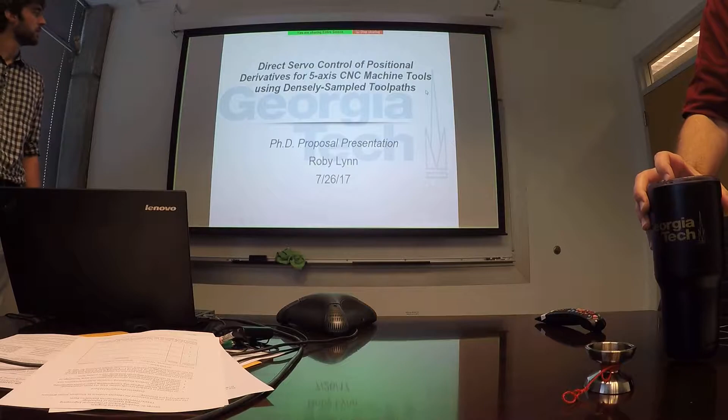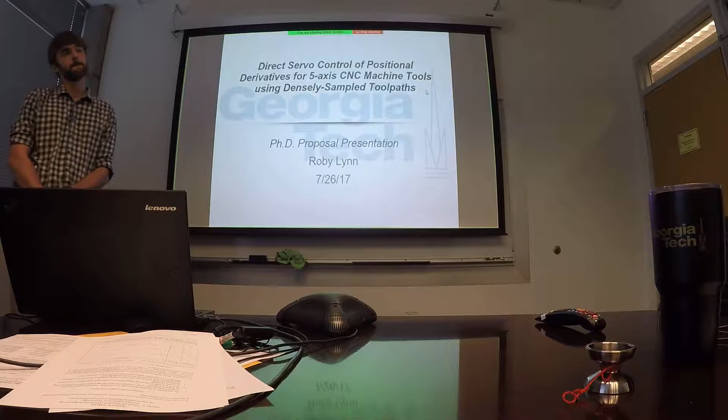I think we have some very exciting stuff. Just to preface it, because I want to make sure the bar is held very high. We did go over some of this with Mazak. You saw the smooth controller there, and Mazak's CEO made the following statement. He said, well, clearly you know more about our controller than we do. So, not to set your expectations high here, but that's exactly where we're at. Oh, and my apologies, our triangular friend here is Tommy Tucker, so Dr. Tucker, who will be also on the committee.

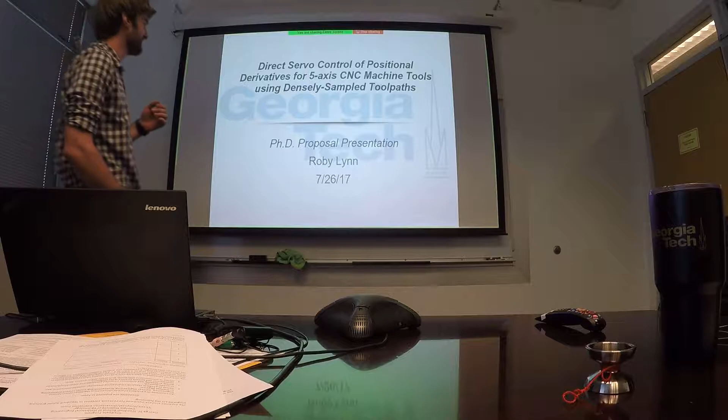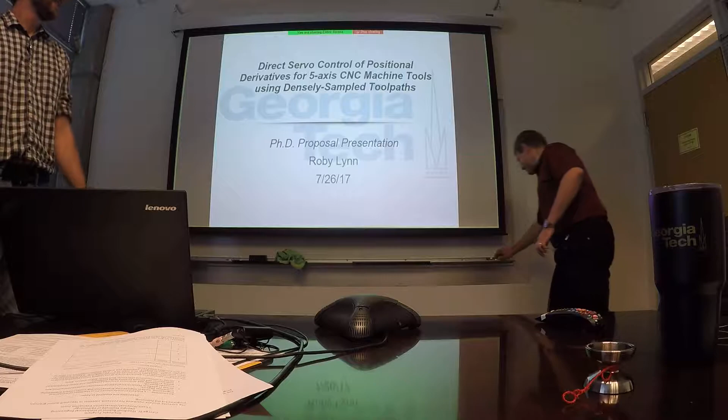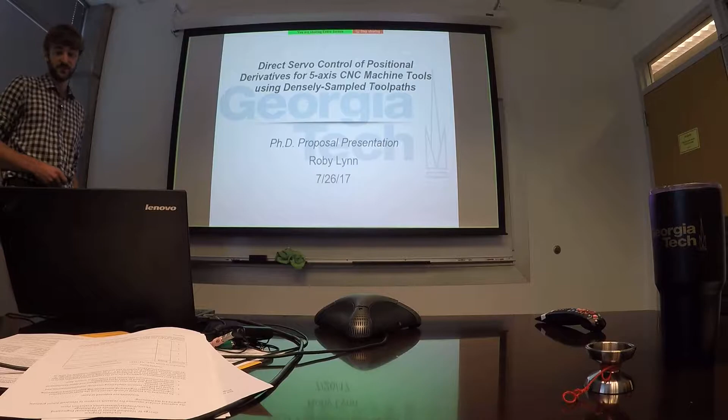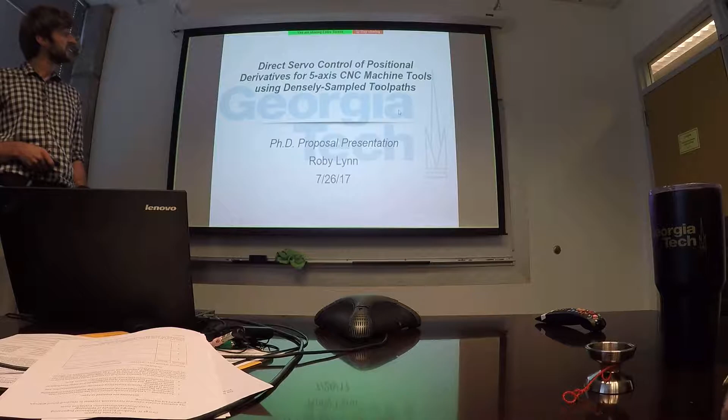Presentation entitled Direct Servo Control of Positional Derivatives for 5-Axis CNC Machine Tools Using Densely Sampled Toolpaths. As you know, my name is Roby Lynn. So first, I'm just going to go over a brief outline of the talk today.

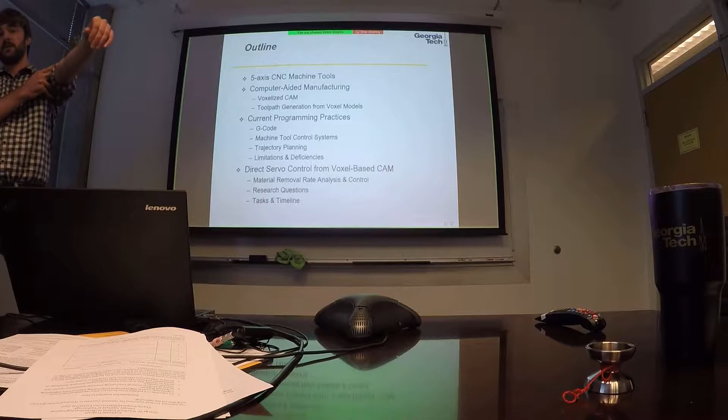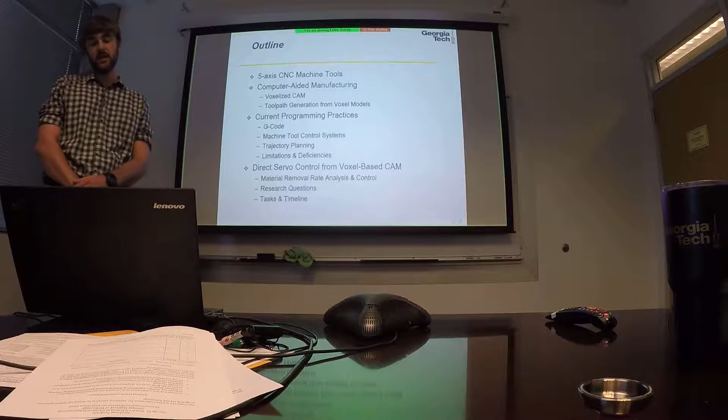So we'll talk first about CNC machine tools, specifically 5-axis CNC machine tools. Then we'll talk about computer-aided manufacturing, voxelized computer-aided manufacturing, and toolpath generation from voxel models. Then we'll talk about the current programming practices of CNC machines. The primary point here is G-code. We'll also talk about machine tool control system architectures, trajectory planning, and limitations and deficiencies of current approaches. And then we will go to the proposed solution here, which is direct servo control from voxel-based CAM.

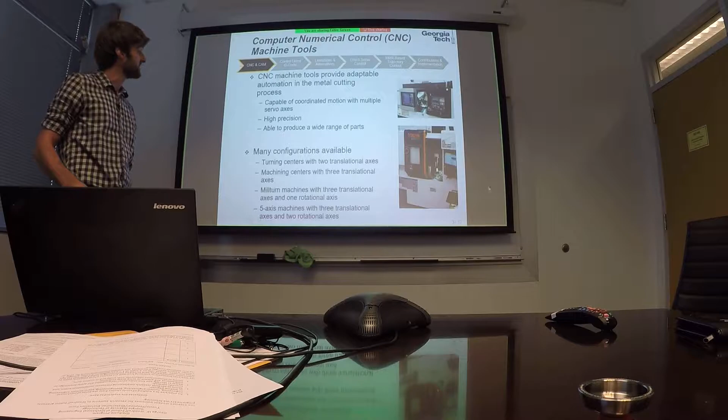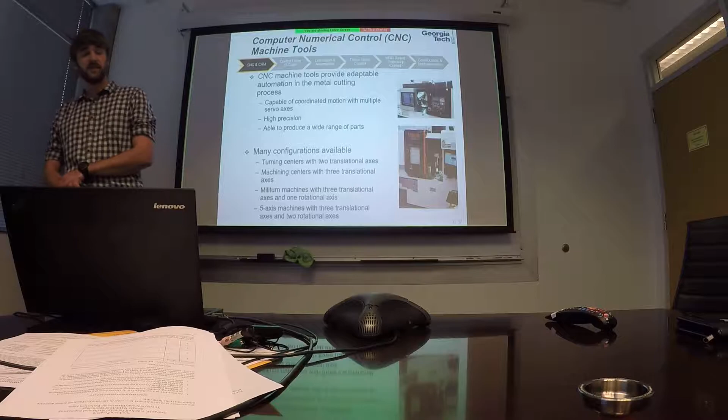There are a number of different types of machines. On the right here we have a 4+1 axis mill-turn machine. This is based on a lathe, and it has a milling head that can index. And then on the bottom we have a 5-axis milling machine. Both of these are on Georgia Tech's campus, actually at our new manufacturing facility. But these aren't the only kind of CNC machines - there are 2-axis lathes, 3-axis machining centers. But for the purposes of today, we'll be talking about 5-axis machines specifically.

So 5-axis means obviously you have 5 axes, and each of these axes can control one aspect of motion of the cutting tool.

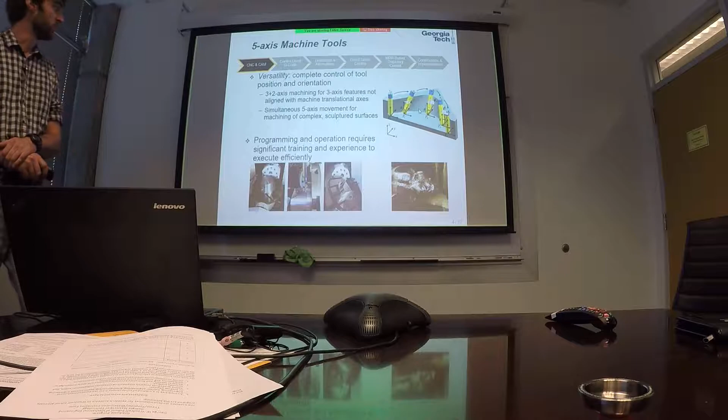5-axis machines allow us to do 2 important things. The first is called 3+2 machining. This is where we machine 3-axis features on planes that are not aligned with the translational servo axes of the machine, such as in this bottom image. You can see we've machined planes by rotating the table holding the workpiece, which in this case is the aluminum cylinder, and we've machined planes at different angles.

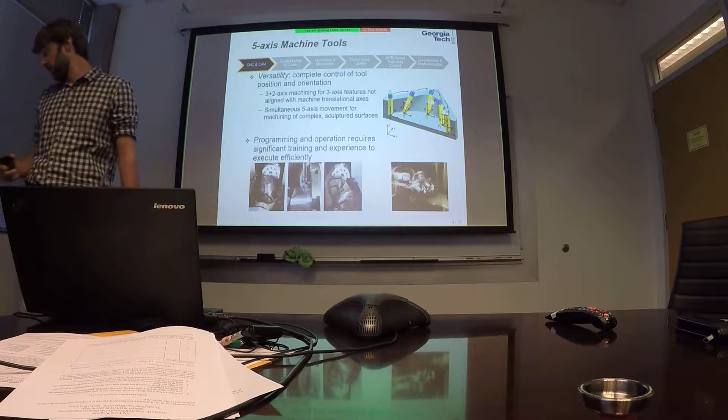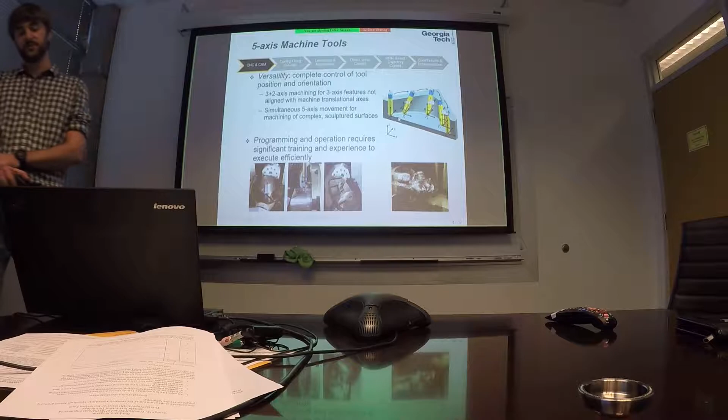The more important thing we can do with 5-axis machines is create complex sculptured surfaces like you see on this King Kong bust, which I have brought today and will pass around. We can move all 5 axes of the machine at the same time to create complex surfaces like this. While that sounds great in theory, it is exceedingly difficult to do, and requires a lot of experience and know-how to both program and operate a 5-axis machine tool to do simultaneous 5-axis machining, which is why we use computer-aided manufacturing, or CAM software.

CAM software is the software that links the design process to the manufacturing process in some way. It allows us to plan what are called tool paths for machining a part within the computer from a CAD model. For those who are unaware, CAD is computer-aided design, so we'll design a part in CAD, import that into the CAM software, and then plan the machining process there.

This provides some level of cognitive offloading from the user because the software is doing the computation to create the tool path. The user is not doing that manually. It allows for visualization and simulation as shown in the bottom here.

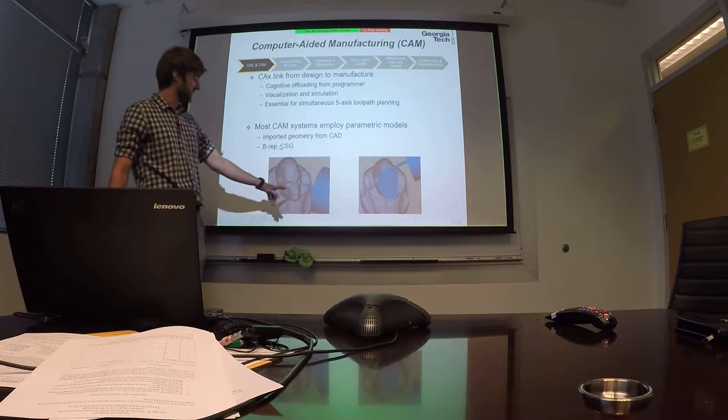So again, here's our friend King Kong. The cutting tool is shown in blue here. The model is in gray, and here is the tool path shown on the face of the model, and the cutting tool, we can animate that driving along the tool path.

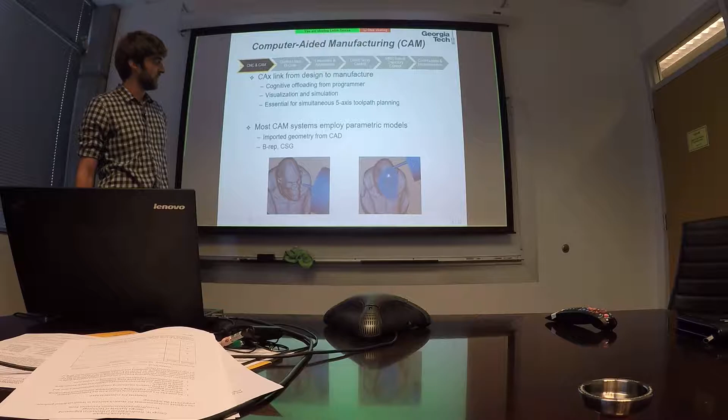This is really essential for creating 5-axis tool paths because of the number of variables involved. We have to control 5 axes in a coordinated fashion throughout the tool path. So without CAM software, this would be very, very difficult to do.

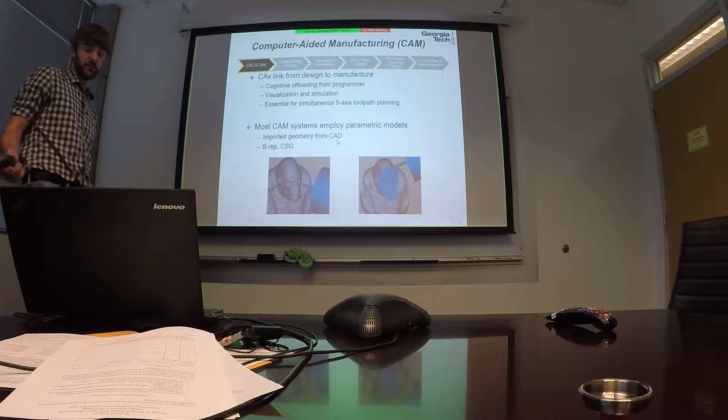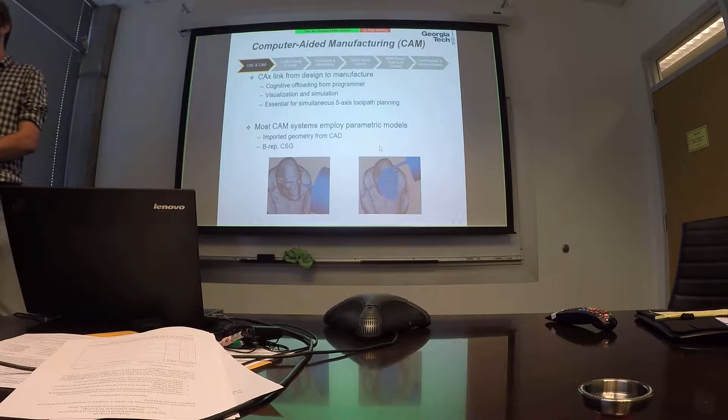CAM software has been around for a long time. It is primarily based on parametric geometry that's imported from CAD. This would be boundary representation or constructive solid geometry, or some combination, to define the part model. That means the surfaces and features that define the part are described in an analytical way, similar to vector graphics.

However, for the purposes of this work, we are relying on what we call Voxel Based CAM. So instead of using surfaces described by equations, we are describing surfaces by these small blue squares shown in this image, and this is good for a number of reasons.

So this allows for simplified collision checking. When we're doing machining simulation, we can have high complexity surfaces made up of these little voxels. We can simulate material removal and also deposition if we were doing additive, but in this case only subtractive. We can simulate material removal easily.

The voxel model is actually effectively a large array. The voxels are three-dimensional pixels. They are cubes, not squares. So if we extend the idea of pixels in an image, we come up with voxels, these little cubes here, and the voxel model is effectively a large three-dimensional array.

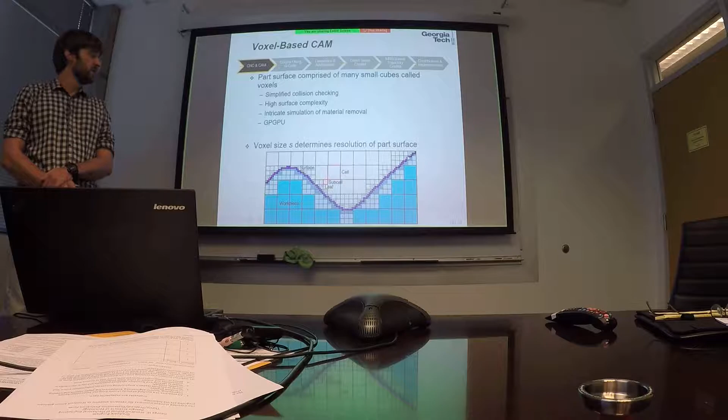In order to speed up processing on the array, we can use a parallel processing platform or graphics processing unit. This bullet, GPGPU, means general purpose computation on a graphics processing unit, which is what we do to accelerate operations on the model. The side length of the voxel will be denoted for the rest of the presentation by S, and that determines the resolution of the part surface, similar to how the pixel size determines the resolution of an image.

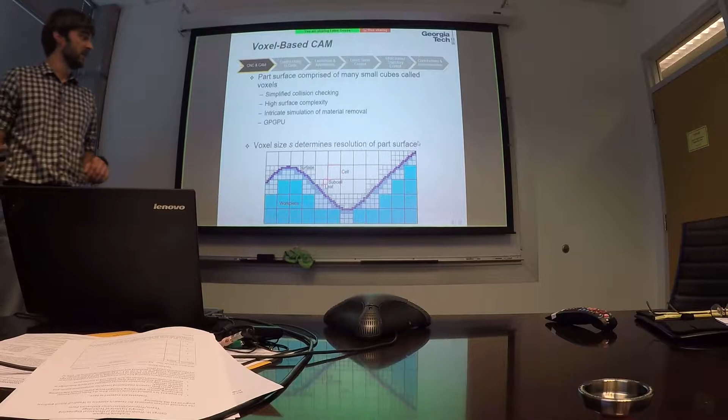In order to plan toolpaths from a voxel model, there are two important concepts we need to discuss. We have 5 axes to control: 3 translational axes and 2 rotational axes. The first thing we're going to do is determine the translational axis positions along a toolpath, and we do this by combining a series of volumetric offsets.

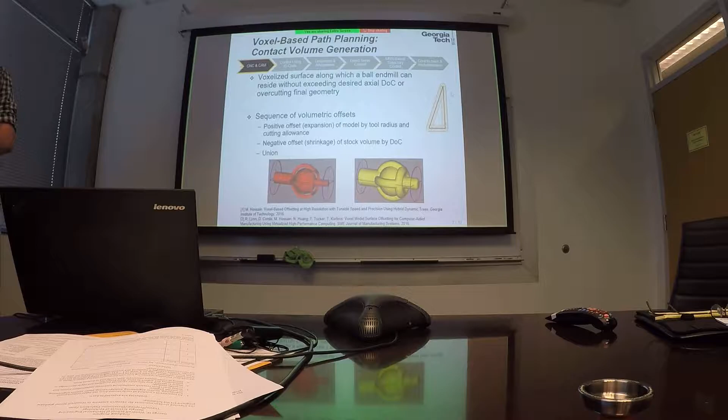Volumetric offsetting is the 3-dimensional equivalent of image dilation, an example of which is shown in this image. Dilation means we're dilating the beginning contour, which is a black triangle, by some kernel or structuring element. In this particular case, the structuring element is a circle, as shown by the dashed line defining the circle here.

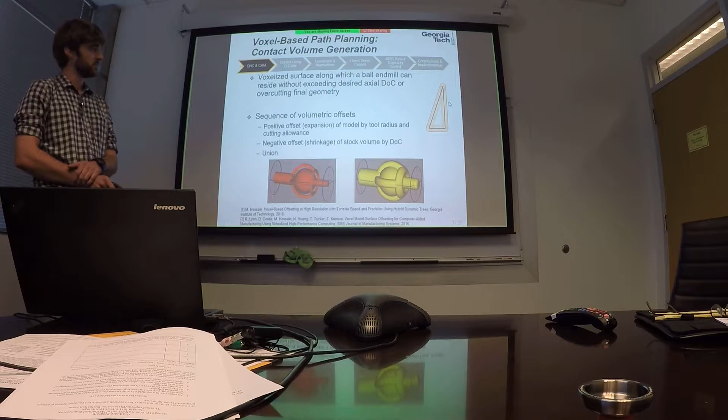If we drag the structuring element along the starting contour and then record the points, record the points...